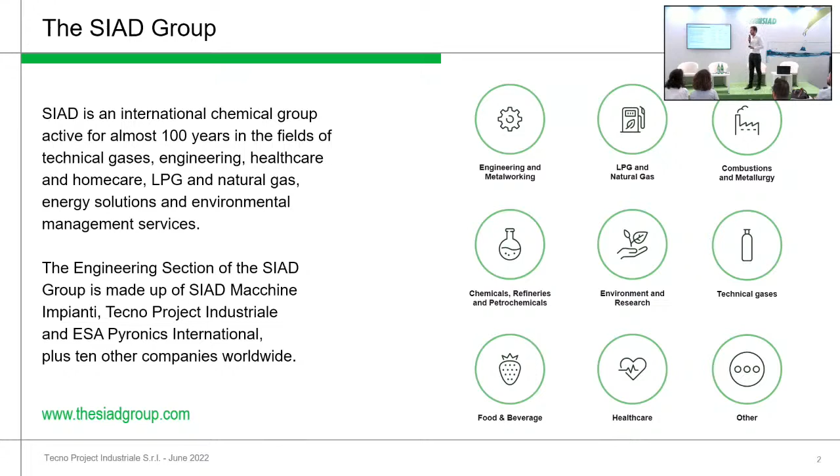We mentioned our values several times already. As we said, in 5 years we will celebrate our 100th anniversary. And of course all of our expertise is based on a constant focus on innovation, technology, reliability, and expertise, but also on social and cultural aspects and the security of our products and services.

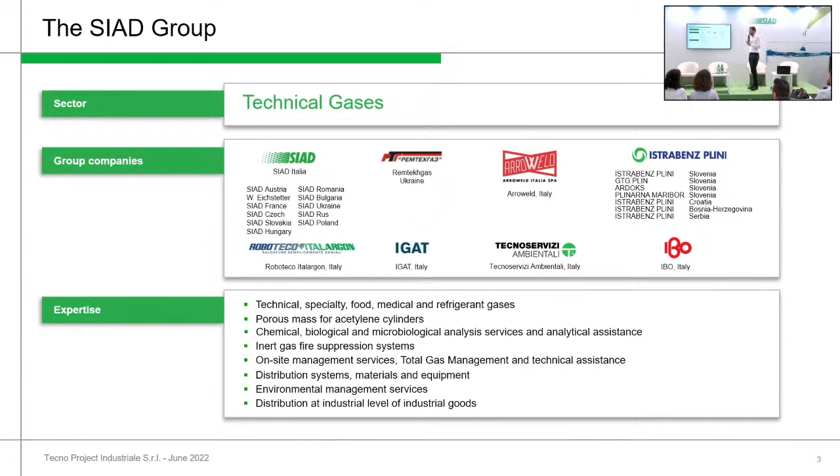Let's focus first on the first planet for SIAD, where it all started: the technical gases industry. Over the years we were able to extend our footprint in terms of territories, especially in Europe and Eastern Europe, providing services and products throughout Europe.

The second planet is engineering. We have SIAD Macchine Impianti, the leader company for the SIAD Group, with two divisions: piston compressors and plants, including air separation units and, lately, biomethane liquefaction plants. That will be the topic of our presentation. We also have ESA, another company belonging to the group, and others.

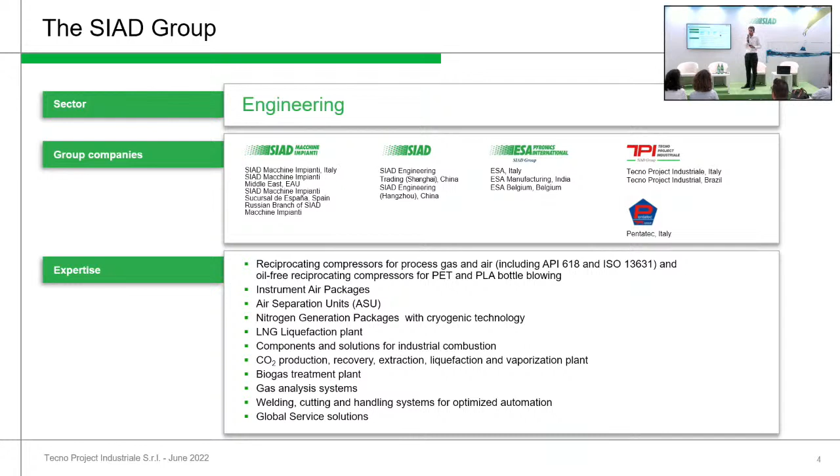We are also present in the Middle East, India, and China. As you see, the applications listed here go from compressors to biogas upgrading, and then healthcare and home care. This industry has become more and more important from a social viewpoint, and we can provide medical quality gas as well as devices, which makes us different, especially on the Italian market.

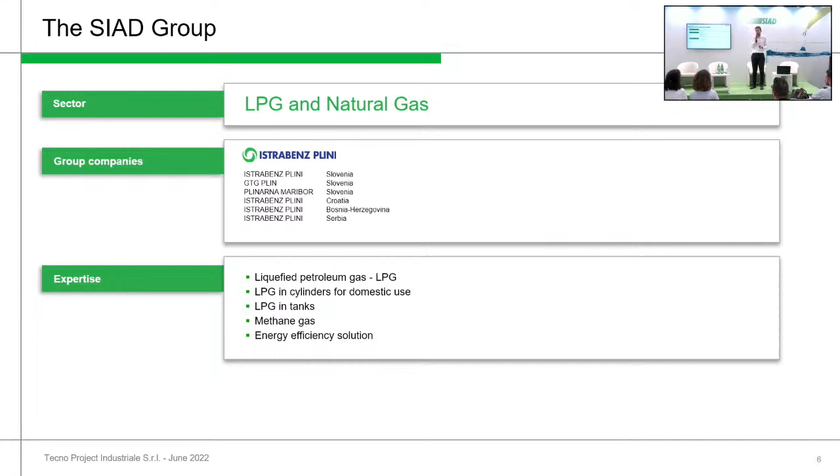And then LPG and natural gas, mainly Istrabenz Plini, especially focusing on Eastern Europe and in particular Slovenia.

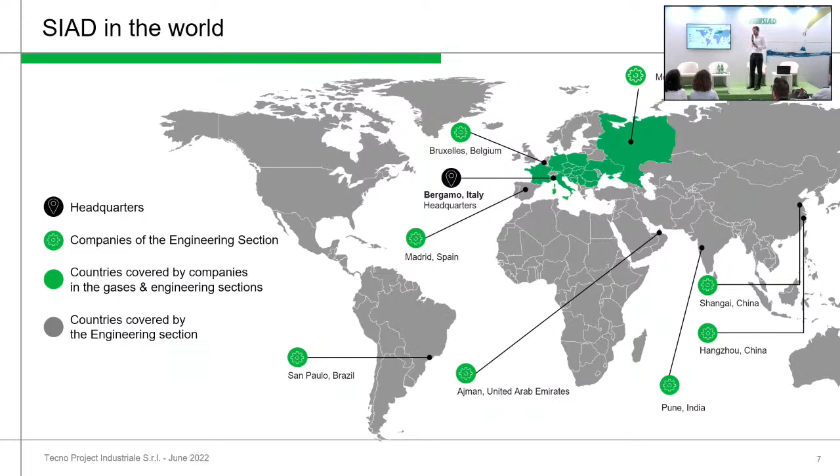After this short introduction, I'd like to show you quite an impactful picture showing where SIAD is present, in particular the engineering section that TPI is part of. As you see, most of the companies are based in Europe, but we are also present in South America and China, and we also have ESA present in India. So yes, we are an international group.

As for Tecno Project Industriale, we are part of the SIAD Group, one of the engineering companies of the group. This company was set up 35 years ago through the idea of two entrepreneurs, who had one gas division and a CO2 plant division.

Then in 2014, Tecno Project became 100% owned by SIAD Impianti, and so what we have left is CO2 plants. One further promising branch was then added, which will be the focus of today's presentation: the biogas industry.

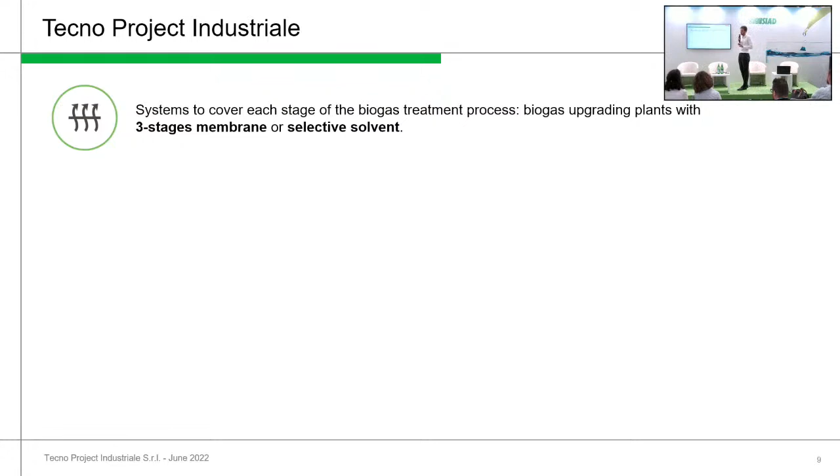Yes, we're part of all of this through the design and production of such plants, and also design and installation of biomethane and methane plants. This is possible thanks to the expertise of SIAD Impianti in this process technology, and we are a partner in this industry, being part of the biogas and gas supply chain.

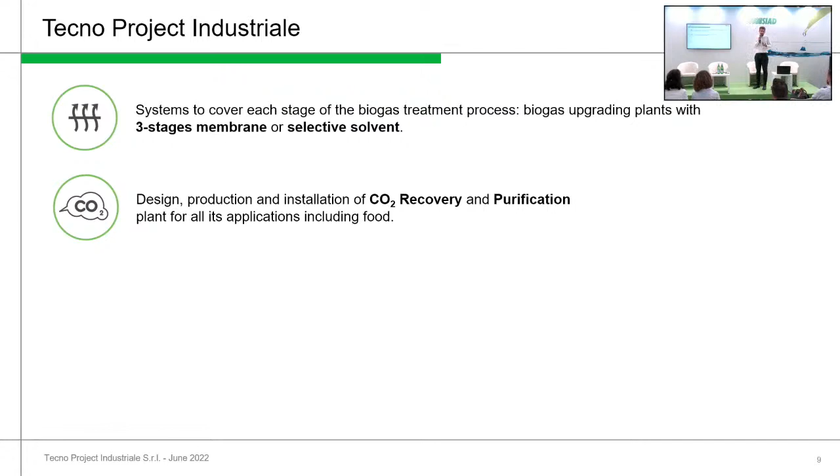But we should not forget the CO2 plant. As you will see, we're able to recover and purify CO2 coming from almost any source, and we are among the market leaders in this technology. Here you see all the possible options and technologies that we can provide.

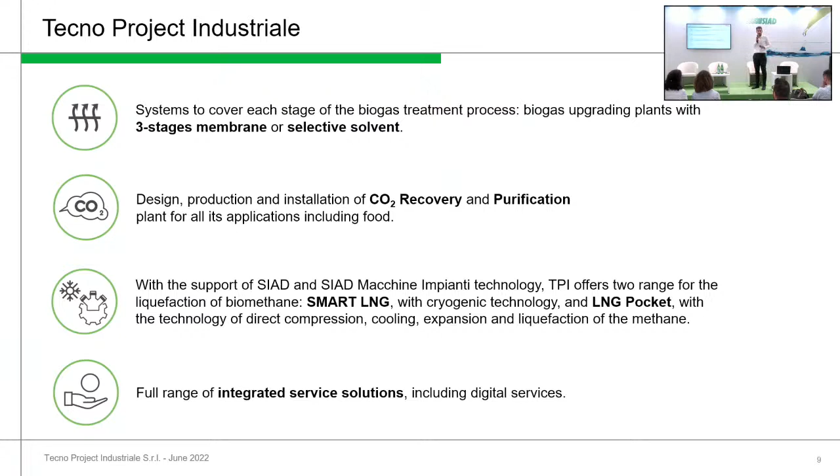Also in the biomethane liquefaction plants, we are availing ourselves of different technologies thanks to different acquisitions on the part of the group, so we can customize the solution according to the needs of the customer. And all of this is accompanied by a full range of integrated service solutions, including the most advanced technologies that are key for customers, also in the management and maintenance of the plants.

So let's start with biogas, biomethane. Tecno Project was actually able to achieve quite an important role in Italy in this industry. We're more linked to the production that comes from organic, different biomasses of the organic fraction of municipal solid waste. So this is made up of CO2 and methane.

So the objective is to extract biomethane. And this biogas, even though it has these macro components, has a different quality, so we can provide biogas upgrading plants that will process gas from the exit of the biodigester, with contaminants, then purified in line with GSE requirements, in our case SNAM requirements, and there are different technologies that you can use for the upgrading.

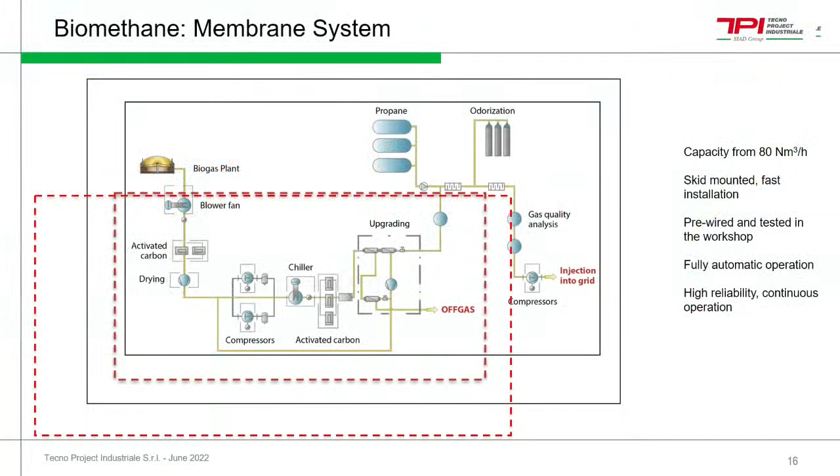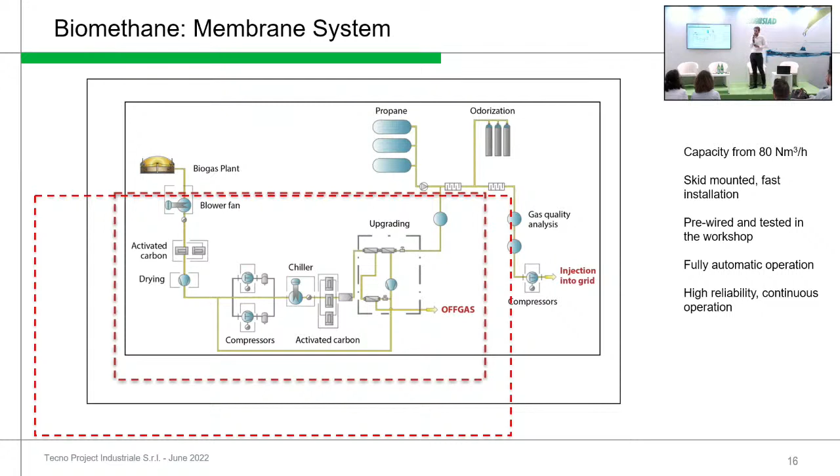We start at the pure biomethane flange exit, but then of course further facilities can be provided, but they're not part of the TPI sort of range. But of course we can propose all of these other pieces of equipment thanks to the partnerships that we have on the market, and all of the parts are pre-assembled at a workshop. These are fully automated plants, easy to control, with high reliability values and high uptimes for the plant.

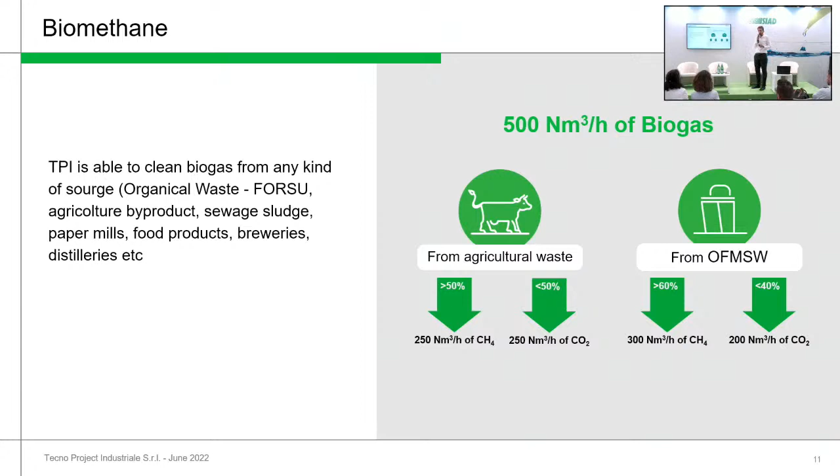We were lucky enough, in the sense that we have different kinds of biogases, to start with the biogas coming from the OFMSW, the organic fraction of municipal solid waste. These plants, especially in Italy, are those that have a high fraction of pollutants. So we were faced from the beginning, at the pilot stage, with high requirements, and this allowed us to be ready for any kind of biogas, so to treat any kind of biogas coming from wastewater, for example, that have lower specifications. So we are really able to treat any kind of biogas.

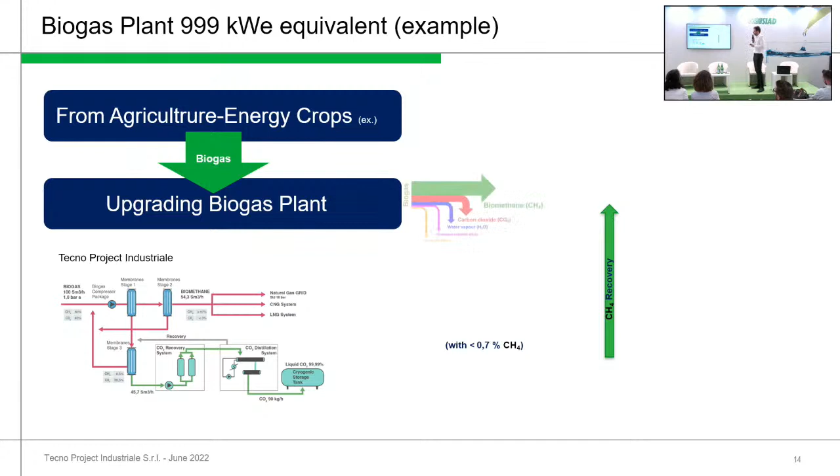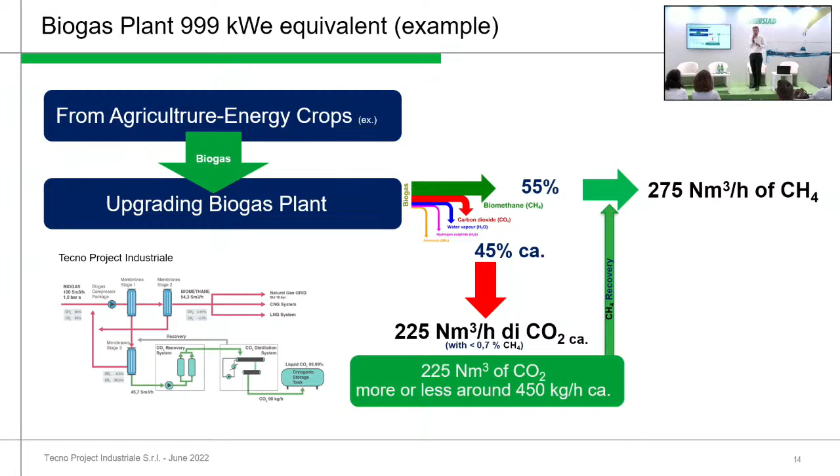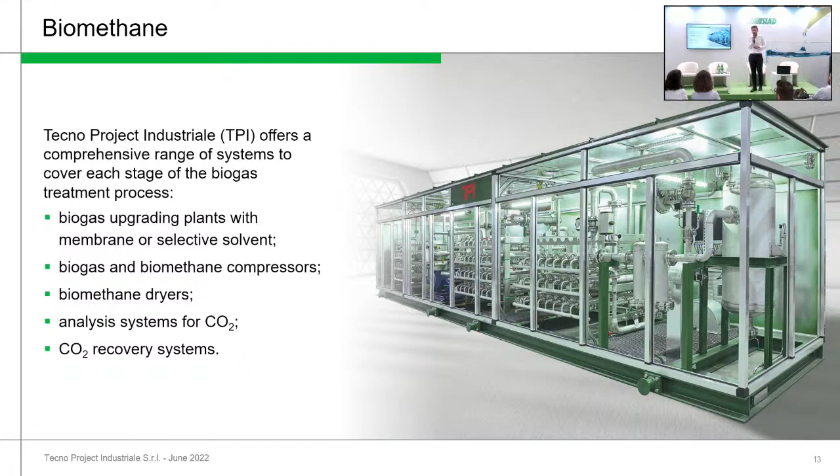As for the products, biogas upgrading plants using different technologies, but not only this, because we mentioned CO2 plants, but also other plants, biogas, biomethane, and analysis systems for CO2 through another company belonging to SIAD, which is Pentatech.

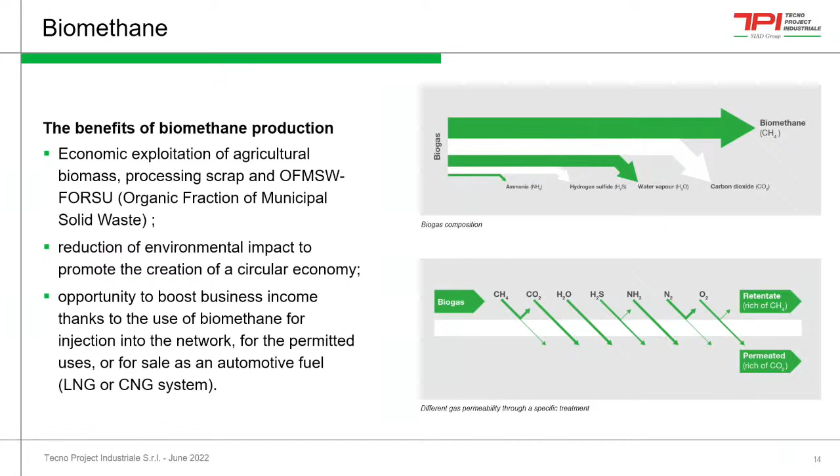Now, the benefits are quite many and quite clear for those that are not familiar with the market. So if you want to provide a boost to your company, and if you want to create value added by creating a product, by processing scrap and OFMSW, well, we will reduce also the environmental impact, fostering circular economy.

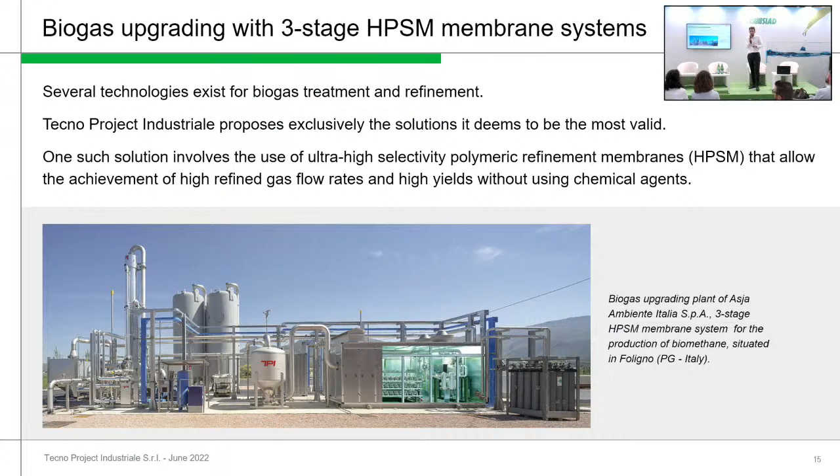One of the technologies that we propose, which is the best one for such applications, is the membrane-based technology, which uses high-efficient membranes to separate methane from CO2. Now, this technology, because of its features, is the one that is more highly developed. It's quite simple, not many pieces of equipment are involved, and it is also very flexible, i.e. by changing the membranes, you can meet different flow rate needs.

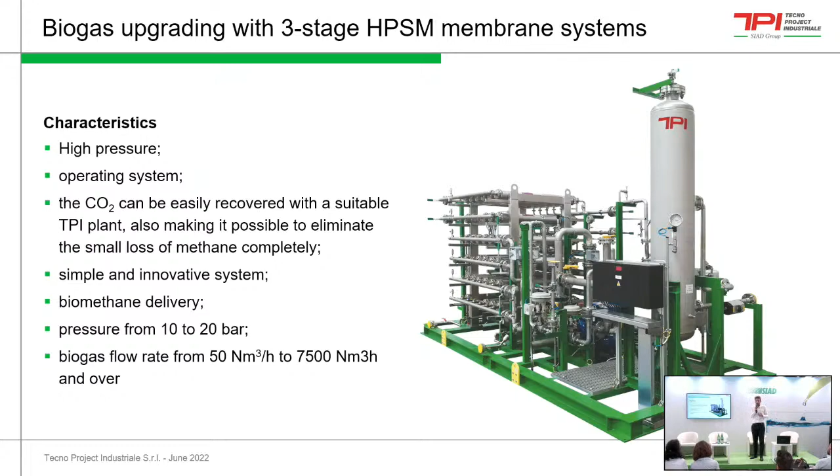The biogas production is not always constant, as we know in certain applications. This is certainly not the case. It's an innovative plant, certainly. We know that sometimes there are more consolidated upgrading techniques, but that are becoming a bit obsolete, whereas the membrane-based upgrading technology, thanks to advanced development in terms of the membranes, we can improve operational costs and management costs. So when it all started some 12 years ago, 5 generations of membranes have been developed with better and better separation capabilities and improvement also in terms of cost effectiveness.

Now actually there's also quite a lot of know-how on this technology as well. As you see, we mentioned methane and CO2, but also other pollutants. We have 2 macro sections, a pre-treatment section and the upgrading plant. The first part will depend on the pollutant inside. The 3 main ones are ammonia, hydrogen sulfide, and others that sometimes come from the OFMSW or just specificities, but considering all of these 3 pollutants, the first step is to remove ammonia and water included in the gas. So we do this through a cleaning tower that can work with water or sulfuric acid solution, which decreases the content of ammonia and cools down the gas, making it become liquid.

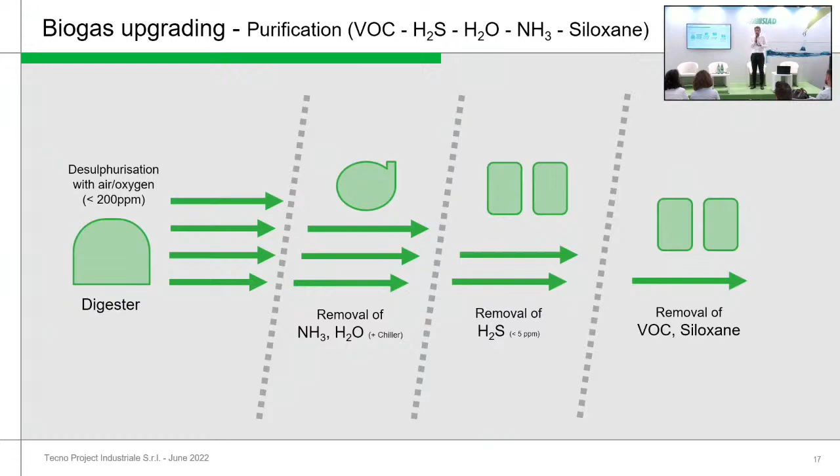Well, why is this pre-treatment stage so important? The gas has to meet the network requirements, and it must comply with all the regional requirements and rules and regulations in terms of emissions into the atmosphere. And the upgrading plant, having at its core the membranes, even though they're high performance materials, they're also sensitive to certain components, and so we need to make sure that these components do not get to the core of the plant, so as not to damage it and the materials, the membranes, or decrease their efficiency.

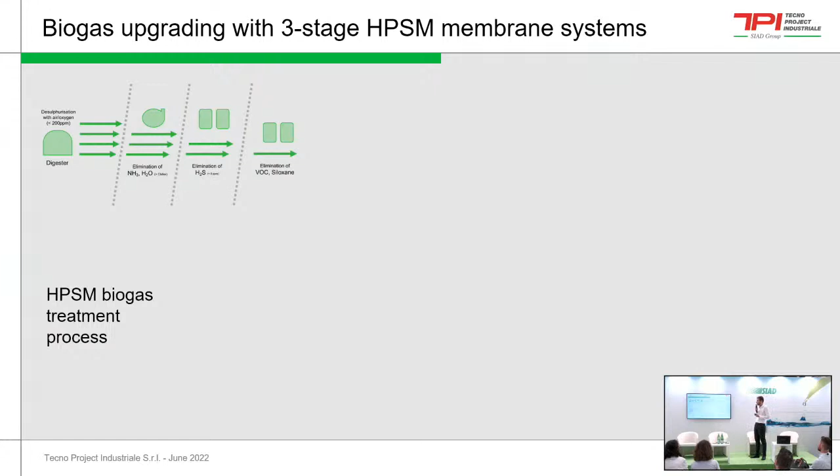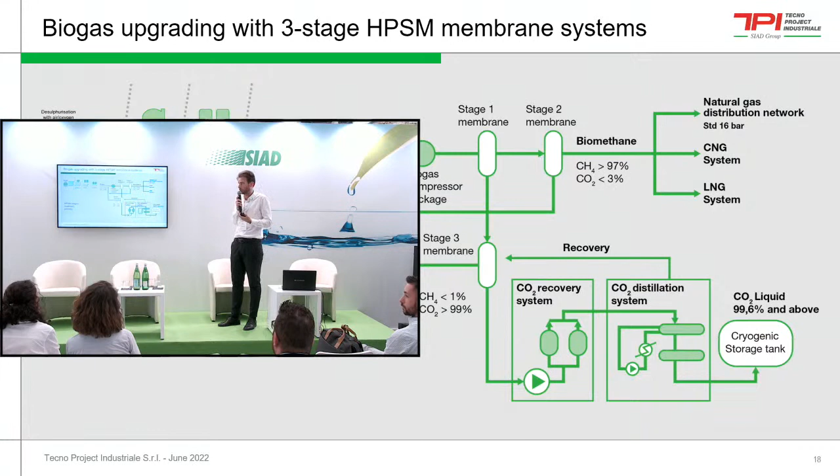So this is actually also the more complex part for the maintenance of the upgrading, because you continuously have to monitor the plant. Once the gas has been cleaned of pollutants, we move to the upgrading part. So we have this pressure jump, and the higher this sort of step is made, and then a biogas compressor, and the pressure that is needed depends on the requirements, needs, and on the network needs, on the membranes used.

Of course, we use membranes in this technology at 16 bars, but in fact, we have a three-stage process that is patented, which allows for the quality required to be achieved, keeping low operational costs and also recovery efficiency high. So we are over 99%.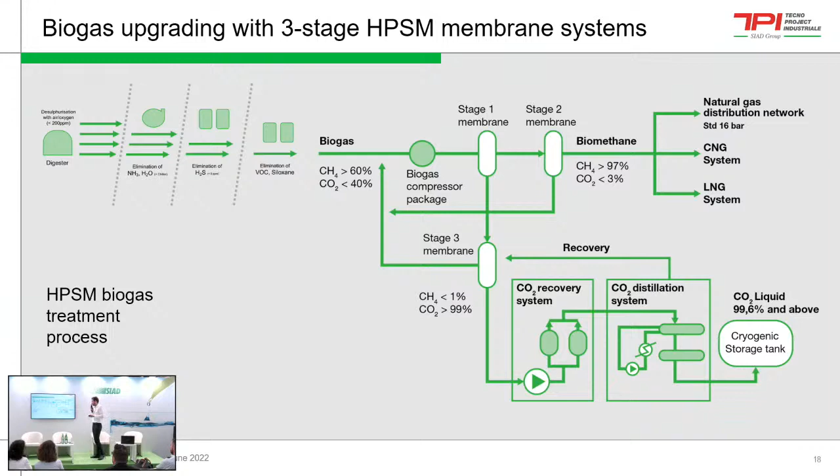In this way, I'm going to describe - we are talking for, this is for natural gas, and then there are different procedures to be activated because you have to achieve a CO2 value that is lower. But all in all, the first two stages are increasing the quality of gas, and the third is meant to sort of recover possible methane losses so that we can produce enough gas with a high CO2 content, around 99%, so that it can be immediately treated in CO2 recovery plants for food-grade CO2.

Another technology that we proposed is the one with selective solvent plant, a consolidated technology that is normally used for the separation of acid gases from various stream types and sources. It has been applied also for biogas. It's a robust technology. And to compare it to the membrane-based technology, well, you can achieve

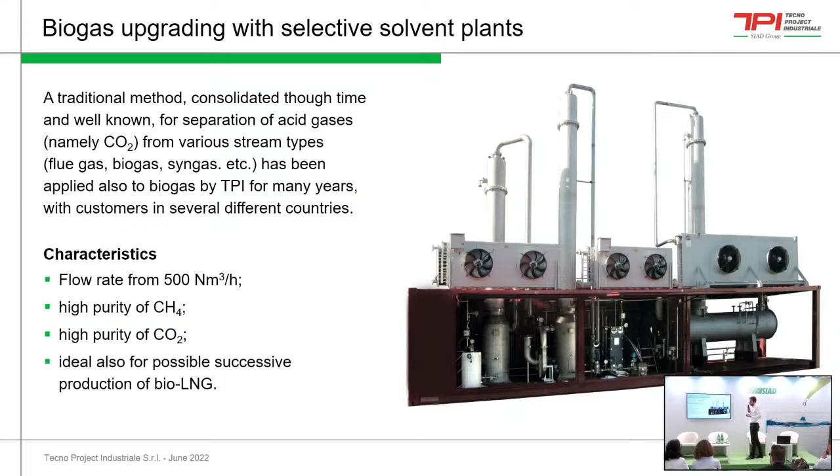also higher efficiencies with lower costs, but the issues are there in the sense that it is a chemical plant, and therefore it needs constant monitoring and high-grade monitoring, and it worries a bit the possible customers. But this technology, as I said, can be used. The weak point for this technology is the fact that we do need steam available on site, but of course you will have to carry over a

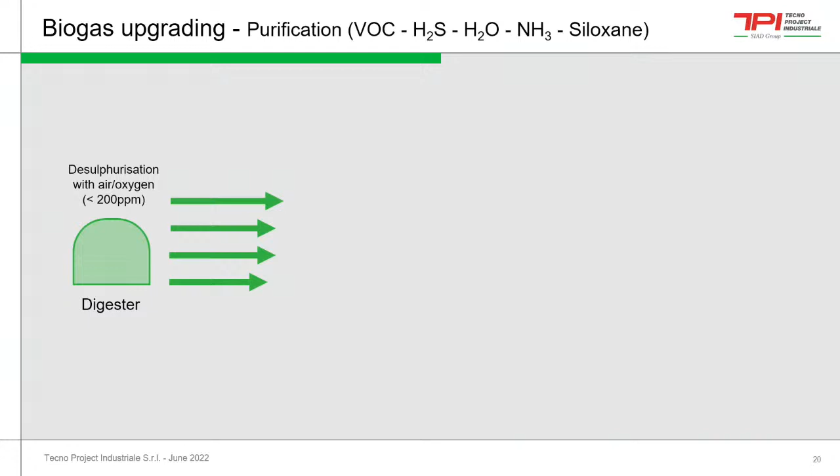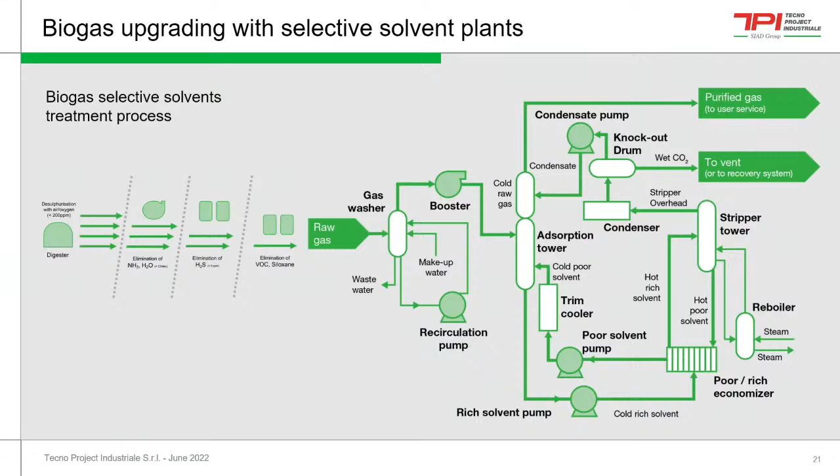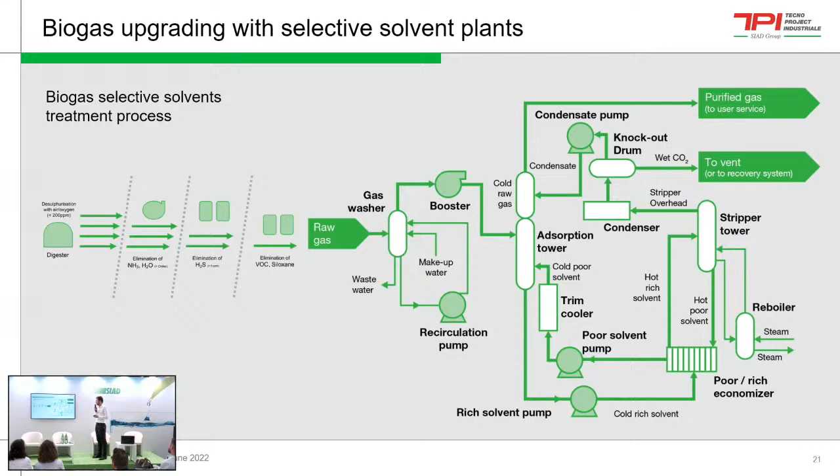purification, and we find the same steps: elimination of ammonia and H2S and VOC and siloxane, and then by use of a solvent we eliminate CO2, and we produce a solvent that is rich in CO2 and has to be recovered so that the plant works efficiently and in line with environmental requirements. So we use a stripper using vapor and steam to eliminate CO2 inside the solvent. So we get CO2 solvent with a low level of CO2.

This is the upgrading part. But there is one further step that Tecno project can provide to its customers: biomethane liquefaction. Well, this is becoming more and more important in Italy and also in Europe for the use of biomethane, to be used as fuel for the automotive sector, and we are able to provide different technologies. We have the smart LNG technology and also the LNG Pocket technology.

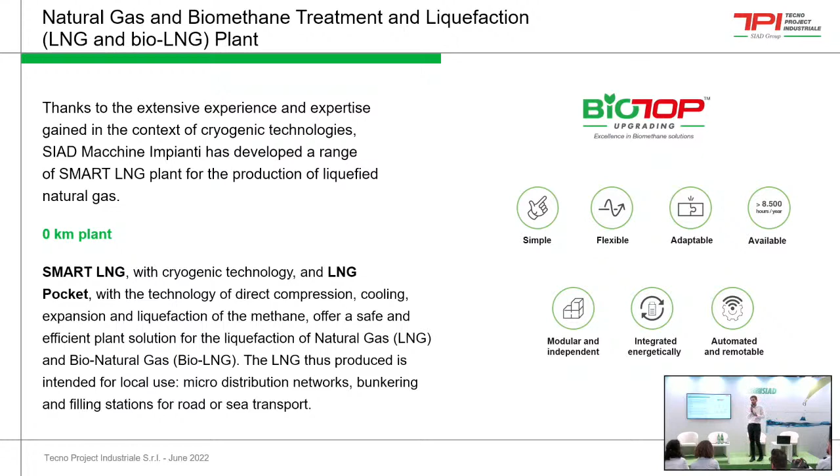The other technology is a bit more complex in terms of the process. Methane is being used by a compression, cooling, expansion, and liquefaction process. There's no one technology that is better than the other. It depends very much on the requirement of the customer. So the fact that we can customize the plant to the requirement of the customer is important.

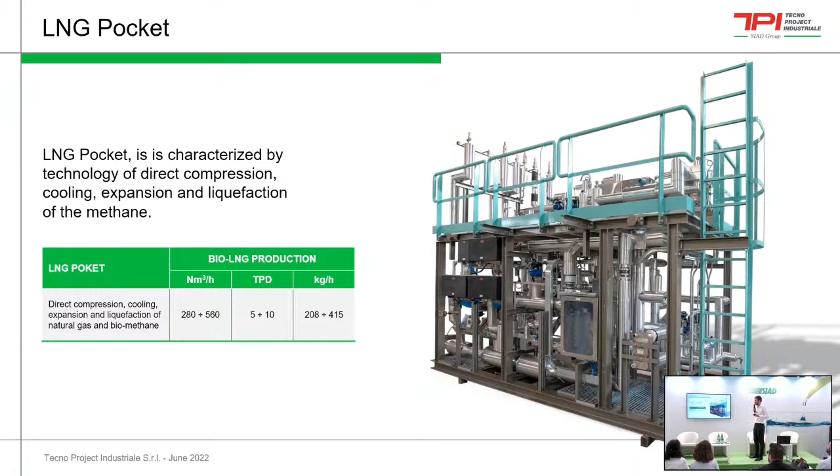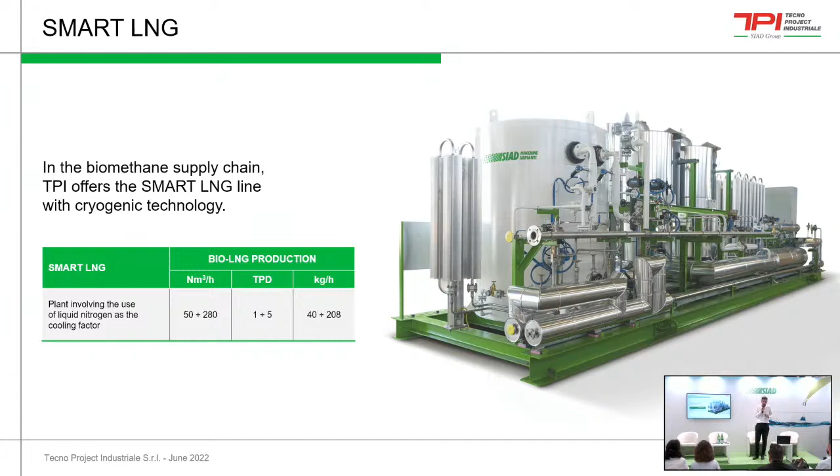And here you see a possible application. As for the LNG Pocket, it can reach up to 5 to 10 tons per day, TPD. As for the smart LNG, well, this is the most suitable one for lower tons, so for a lower number of tons from 1 to 5. The pre-treatment polishing stage is the same. It's a TSA that reduces the CO2 content in the biomethane down to values that are suitable to avoid the solidification of this component in the biomethane during liquefaction.

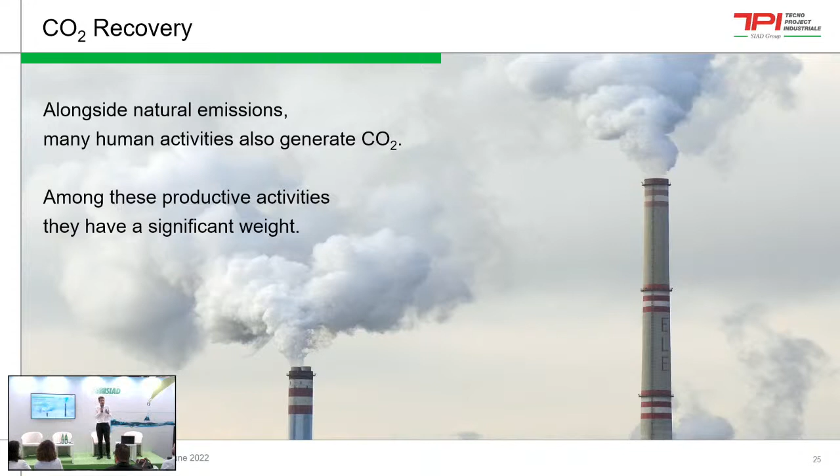The other industry CO2 plant, another area we work in is CO2. Well, you know very well, due to the Paris Agreement and the ambitious targets set by the EU, that we need to reduce greenhouse gases, and one of them is CO2. And any farming activity or industrial activity produces CO2, so we need to reduce CO2. But maybe just a few know that for many companies it is a requirement, but it can also become a value added.

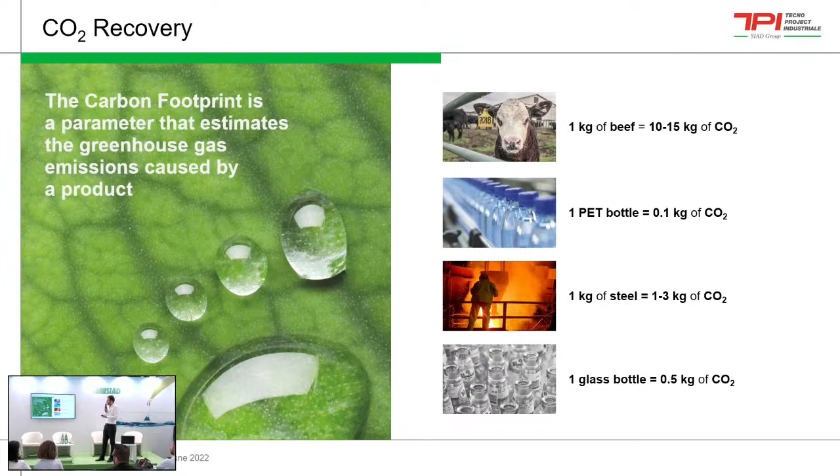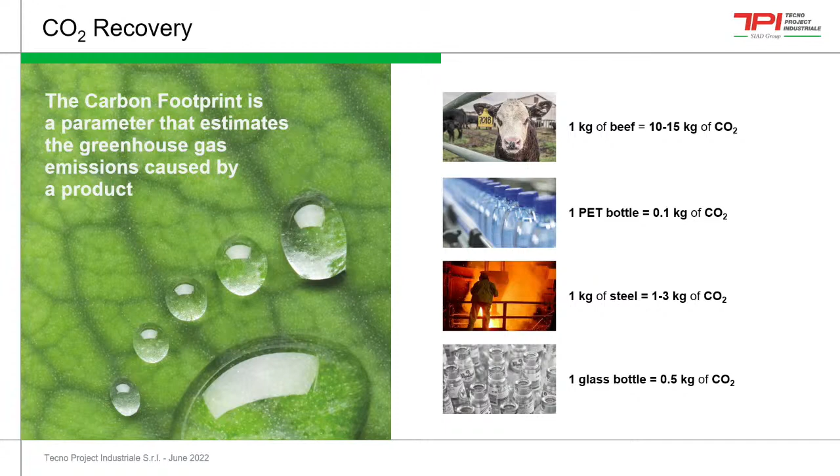So first of all, we have to consider the carbon footprint, which is the greenhouse gas emitted by the product manufacturing. You see, 1 kilogram of beef can produce 10 to 15 kilos of CO2, so you understand the impact of that. But in Italy, we need 500,000 tons of CO2, and historically, the CO2 comes from petrochemical processes or fertilizer producers, ethanol, and also other techniques.

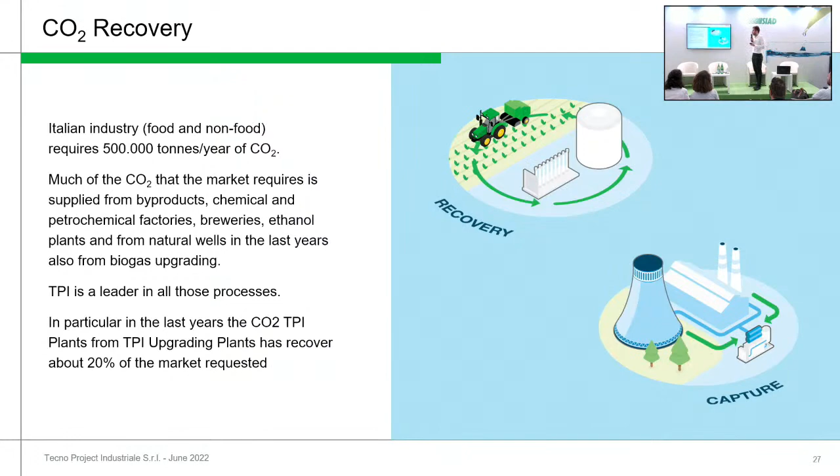But most recently, thanks to biogas and biogas upgrading technologies, biogas can become a source for food-grade CO2 production. And when it comes to this technology, I have to say that we are a leader, and we can customize the process depending on the source to be treated. In particular, we account for 20% of the Italian market for the supply of these plants. This is quite a lot if you consider that Tecno project has a smaller size compared to other big players. Now, there are three main areas.

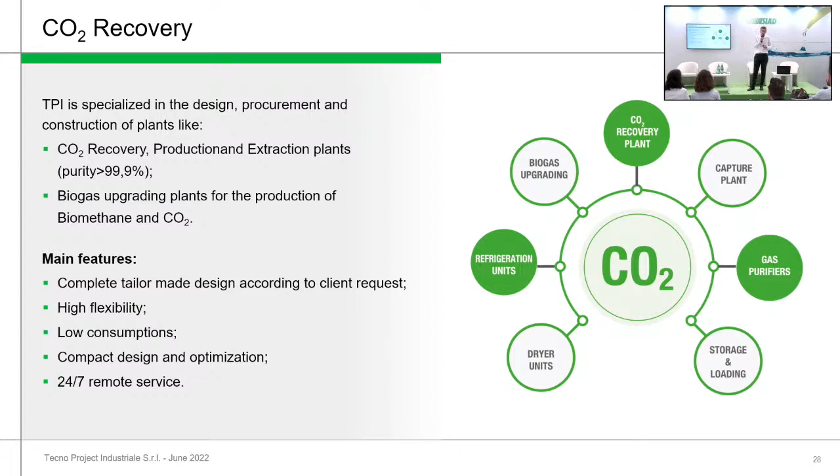First of all, we have to look at CO2 content. So if we look at manufacturing plants, CO2 is recovered. Flow rates are very low. For example, there are some plants where the gas is burned to produce CO2, and this unfortunately happens in some countries. There is no drinking water, but they do have methane. And then there are other units treating medium quantity of CO2, and then we have the liquefaction plants. In this case, the CO2 content is higher than 90%, and in this case, food-grade CO2 is produced.

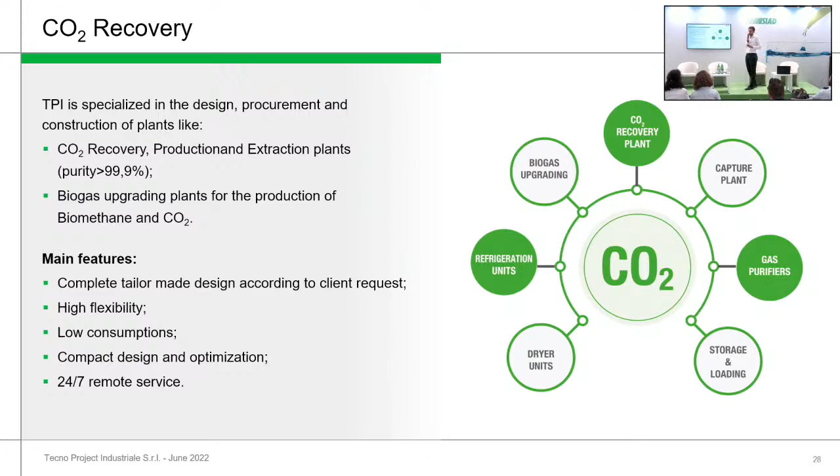Now, the food-grade CO2 is what we offer. So as Tecno project, in compliance with all the regulations, we can really supply this type of CO2 with a purity which is higher than 99.9%. But not all plants can guarantee such a purity grade.

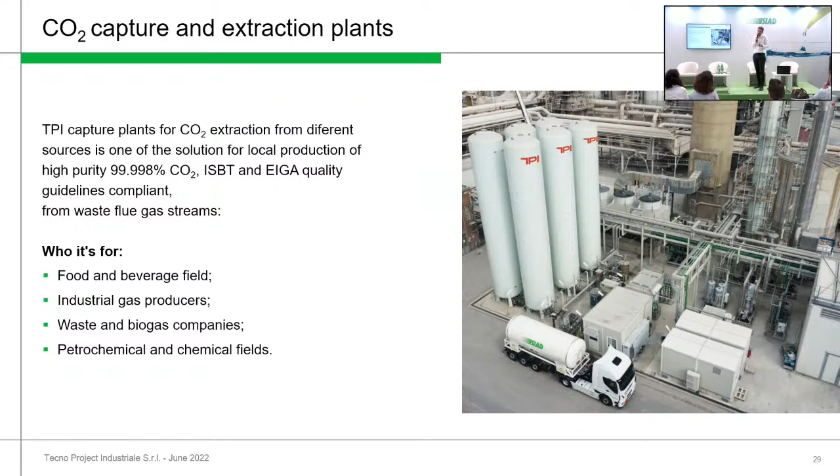This is an example of CO2 capture and extraction plants. When I say food-grade CO2, we do have the 290 regulation. It is an EU regulation for food-grade CO2, but there are different rules and requirements, also stricter ones. Not in terms of plants, so the plant doesn't change, but we need assessment analysis instruments for CO2. The most common ones are ISBT and EIGA quality guidelines. They apply, for example, to breweries or distilleries or Coca-Cola plants, for example.

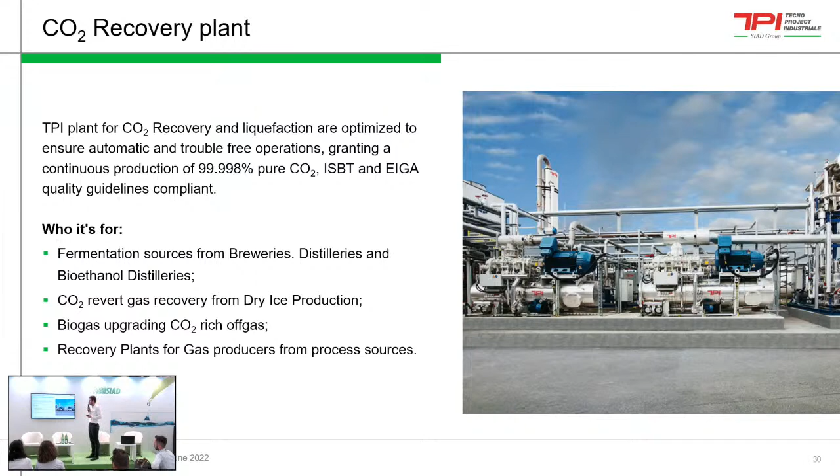And then we have the CO2 recovery plant. This is the very last step in the process for the production of liquefied food-grade CO2. And these can directly be used, for example, in breweries. This was actually the sector where we started from as Tecno project, working on the fermentation process. Over the last few years, other companies were involved, in particular the ones working in the technical gases sector, and other companies working in the waste industry, for example companies providing incineration plants. So there is really a lot of customers for this type of CO2 production.

So as we said from the beginning, we do offer service, support and assistance to customers for the operation and maintenance of the plant. We do provide different levels of service. We offer the integrated full service. This is done by Tecno project in Italy and in other countries, supported by SIAD. We do take care of maintenance, we supply spare parts, we offer remote assistance 24 hours a day, 7 on 7, and also training courses.

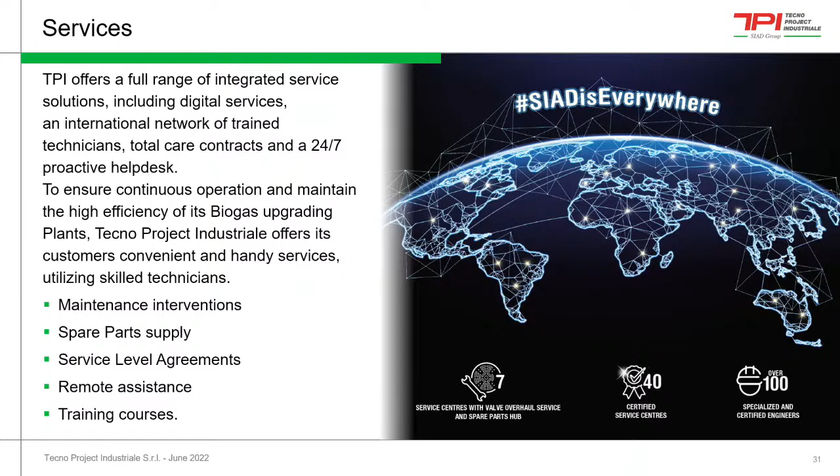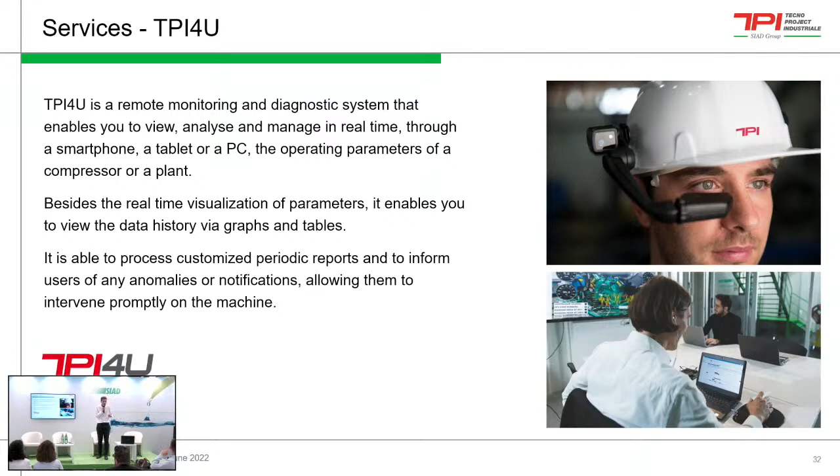And this is an important service because this is a new service named TPI for You. This is a remote monitoring diagnostic system that makes it possible to check the operating parameters of a plant using a smartphone. The system can be tailor-made. We can set specific warnings or alarms in case of problems to the plant, and reporting activity is also provided. So this is a cloud-based service that we offer, and this is different compared to the type of service offered by other players.

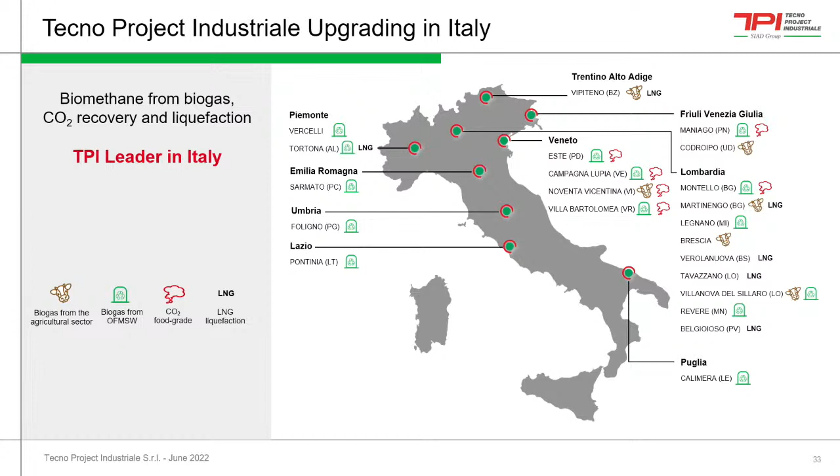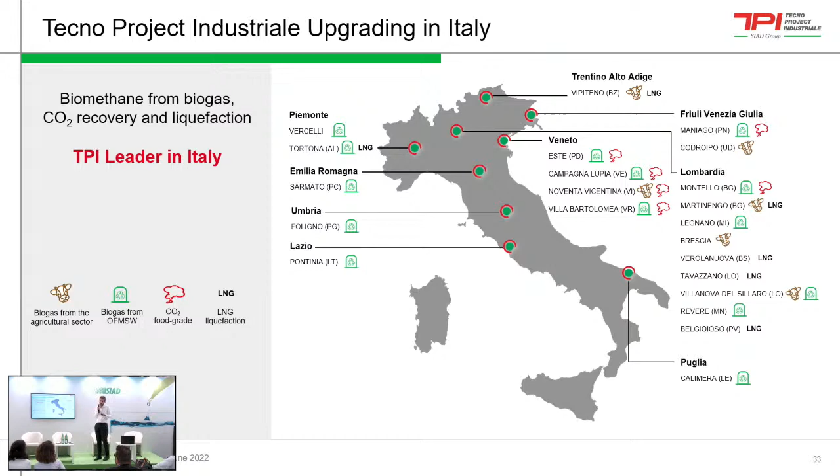Now, let me really conclude by also giving you an idea of our presence. In Italy, biogas upgrading is our main activity, and we have different plants of different sizes. Unlike competitors, we have some of the largest plants in Europe when it comes to the amount of biomethane produced. We also have biomethane liquefaction plants, and this is quite a new technology which is becoming more and more common. We have a number of plants using both technologies, mostly in Italy.

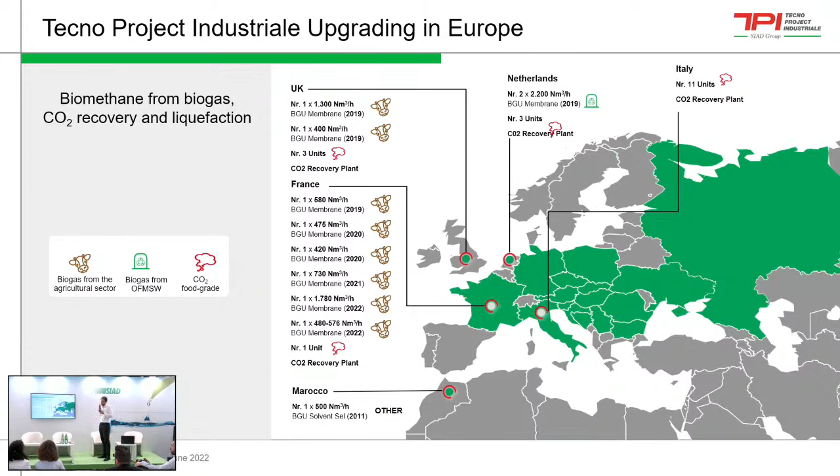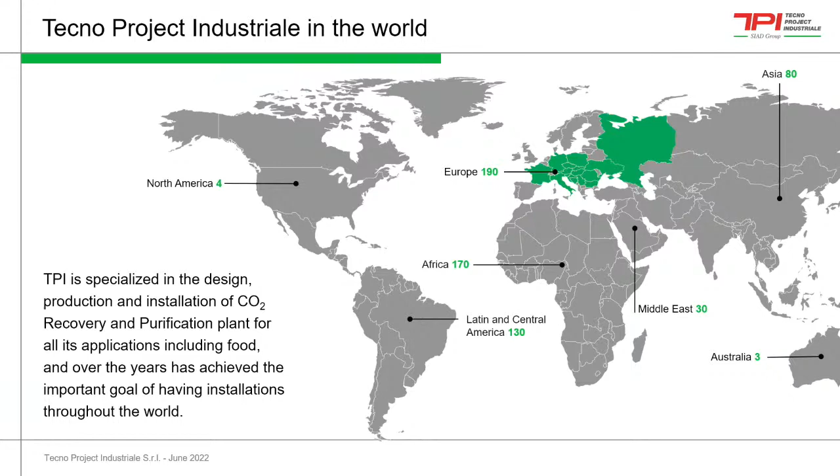And if we want to have a picture about Europe, you see we have CO2 recovery plants from biomethane. Of course, if we look at CO2 applications, we have more than 600 plants in Africa, Middle East, basically CO2 plants, depending on the type of customer.